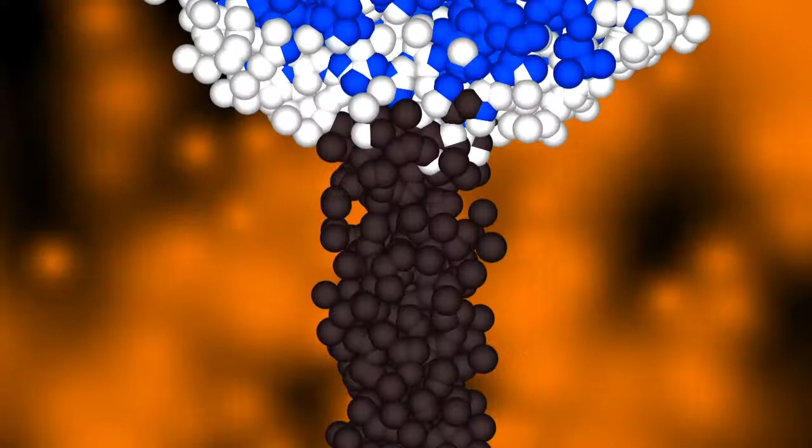As the global economy develops, there is a growing demand on energy, particularly oil. However, oil, a strategic resource of our economy, is gradually in depletion. This is a challenging issue for every country to face and cope with.

The future of petroleum: EOR technology and equipment.

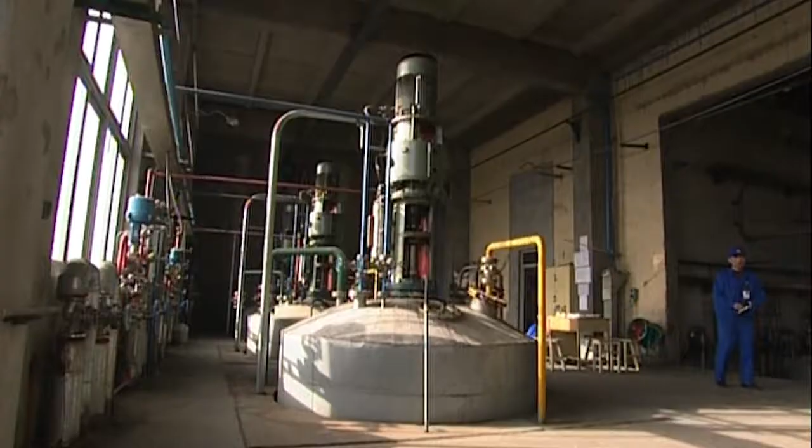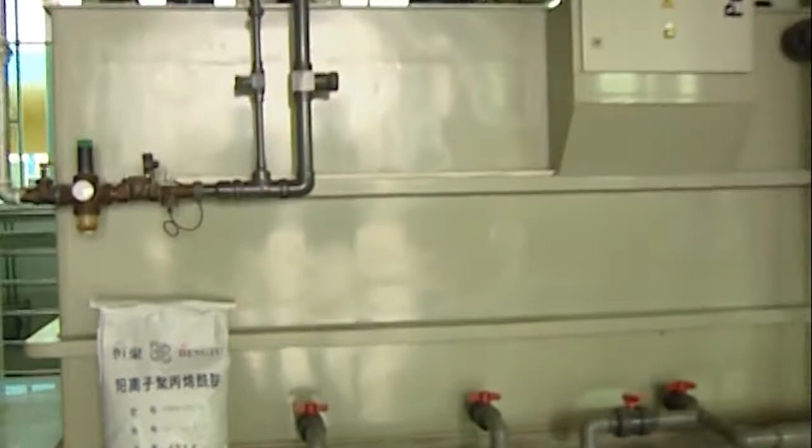Beijing Hengju Chemical Group Corporation is looking to the future to address this issue, and after many years' research and development, we provide a wide range of products and services to the petroleum and chemical industry. Our products and services include oil-field chemicals, water treatment chemicals, and associated engineering equipment.

After 20 years' growth, we have developed into a leading polymer manufacturer in China, and moreover, a renowned and experienced international organization, supplying product and associated engineering services for oil field production and drilling, enhanced oil recovery, and water treatment.

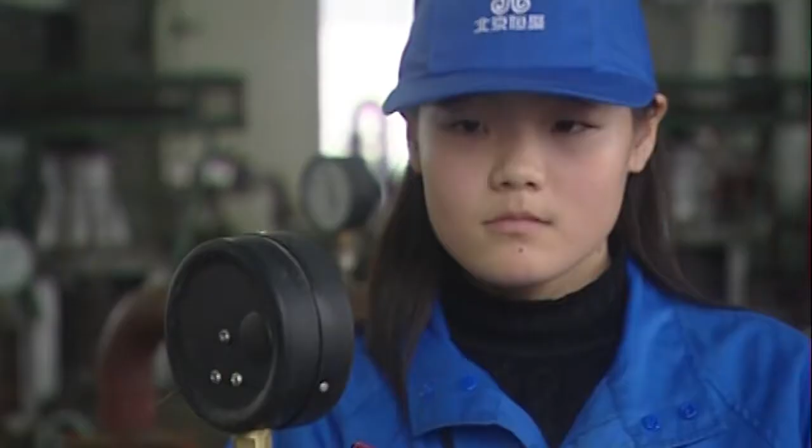Beijing Hengju is fully committed to the development and servicing of the international market, and now has fully owned overseas subsidiary companies in Canada, the United Kingdom, the United States, and Oman, and offices in South Africa. We have 3 production sites in Beijing, Shanghai, and Henan, along with a Research and Development Center.

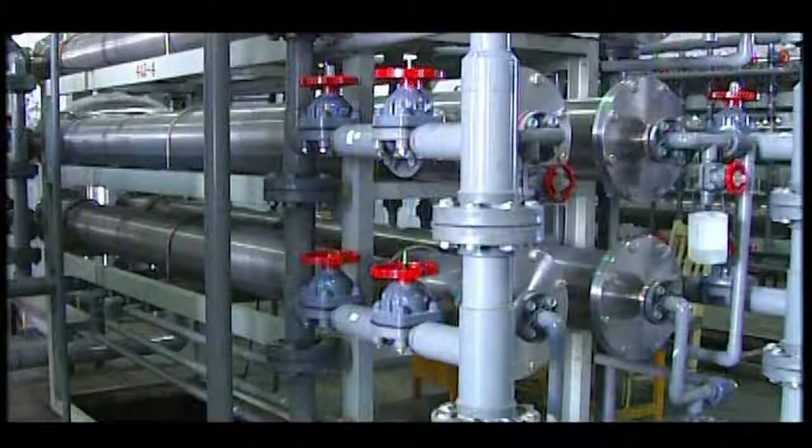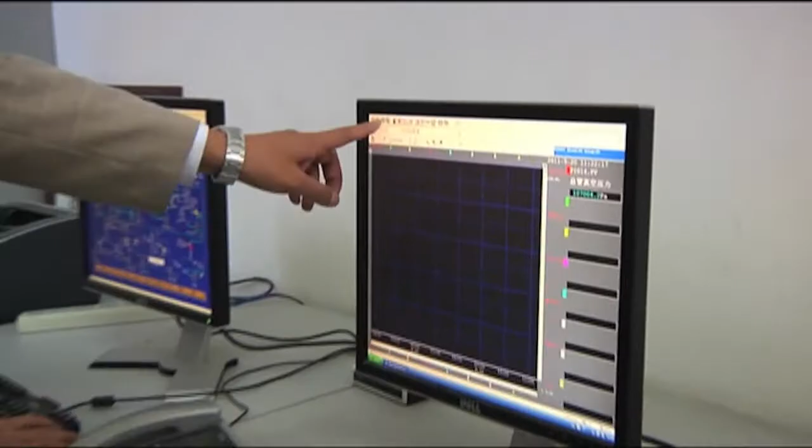The current total polymer capacity is 100,000 tons per year, acrylamide 100,000 tons per year, and others 20,000 tons per year. To meet the growing market demand on ASP flooding, we can supply EOR surfactant with a capacity of 70,000 tons per year.

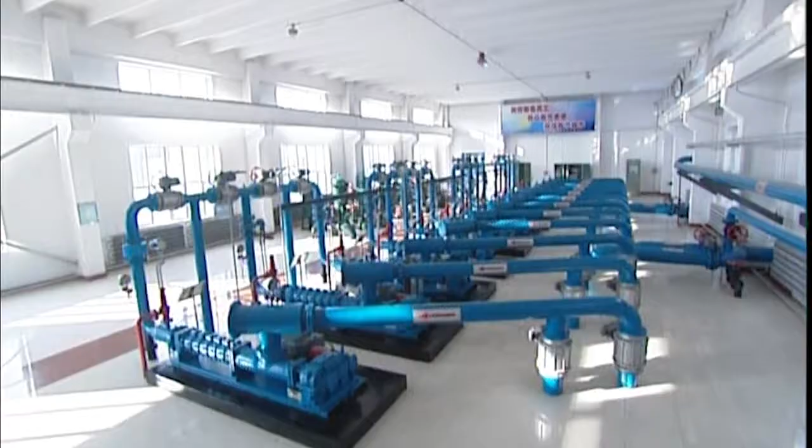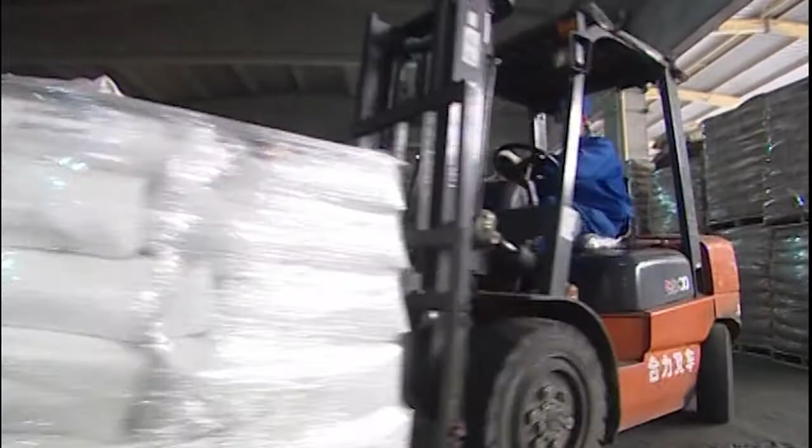Beijing Hengju has grown rapidly as a result of its involvement in the Chinese oil field industry from 1993, where a variety of our products were used to improve the efficiency of oil production, including EOR research and development. So far, over 500,000 metric tons of EOR polymers have been supplied to Chinese oil fields. More recently, associated engineering equipment have been developed and supplied too.

Today, Beijing Hengju's footprint on EOR projects is both home and abroad, such as Daqing Oil Field, Shengli Oil Field, Huabei Oil Field, Dagang Oil Field, Xinjiang Oil Field in China, as well as oil fields in Canada, the United States, South America, Russia, the Middle East, and Asia Pacific.

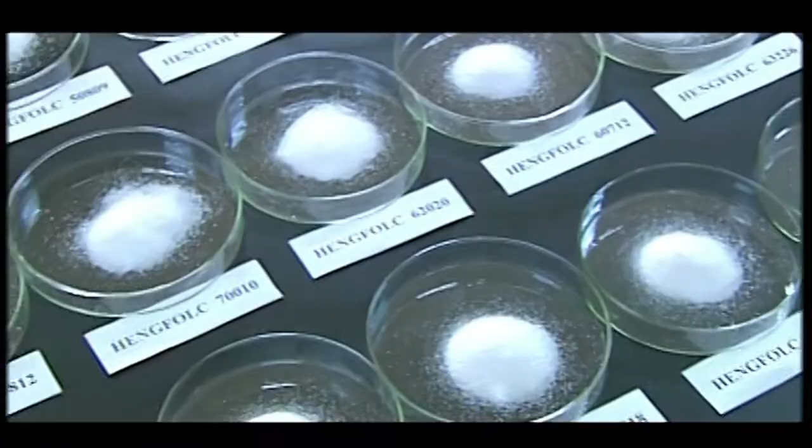Our EOR chemicals consist of 3 series: Kaipam, Hengfolc, and Hengpan. They are used to improve oil recovery rate, profile modification, as drilling fluid additive, and fracturing and acidizing treatment.

To meet the requirement of high temperature and high salinity level, we developed the Kaipam series, which have a comb branch polymer structure.

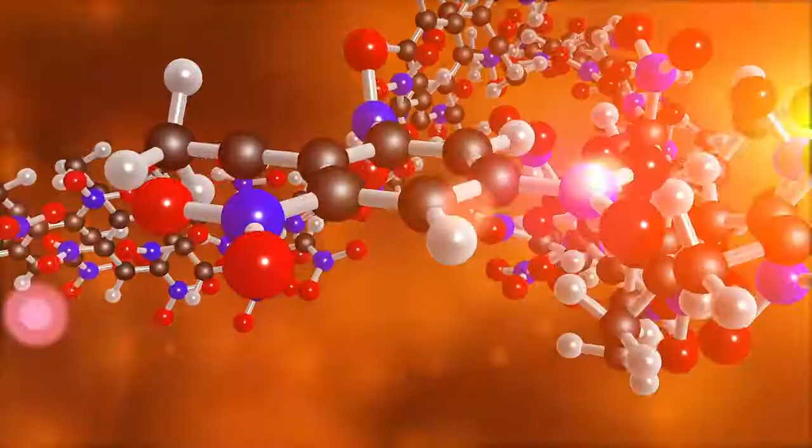Kaipam is applied in a variety of reservoir conditions, particularly in high temperature and high salinity condition, where Kaipam products still maintain a high viscosity, so the usage is reduced by 20 to 25%. In this case, Kaipam is extensively used in most Chinese oil fields as a more economic solution.

Kaipam has been through 2 generations. Kaipam X series is used in reservoirs where temperature is below 80 Celsius and salinity is equal to or lower than 30,000 mg per liter.

Kaipam XSH, the second-generation series, has a viscosity retention ratio that reaches industry standards at 90 Celsius under non-oxidant conditions, with salinity up to 60,000 milligrams per liter. It's a high temperature and high salinity resistant polymer.

For example, Kaipam 7S is used in the high permeability condition of Shengli oil field. Kaipam 1S and Kaipam 2S are used in low permeability of Jiangsu oil field. Kaipam 3, 4, 5, 6S, H are used in the oil fields of the Middle East, Africa, America, and Asia Pacific.

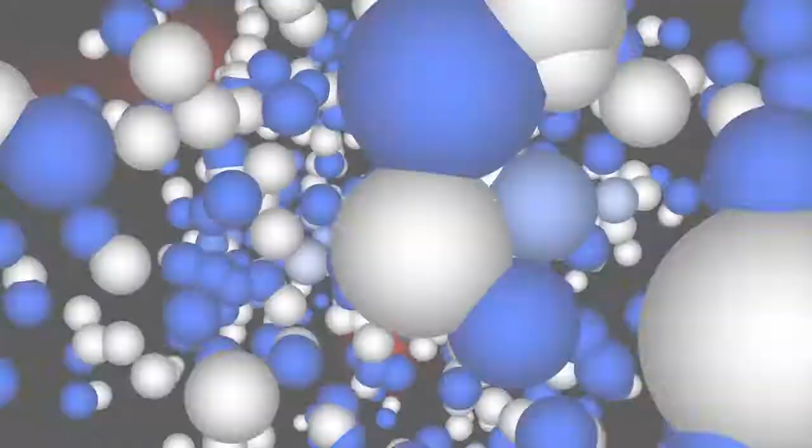To meet the growing market demand on ASP flooding, the EOR surfactant BHS series is developed. BHS surfactant has strong anti-adsorbent properties and is compatible with other chemicals, achieving high activities within a low concentration range and can be adapted to different conditions.

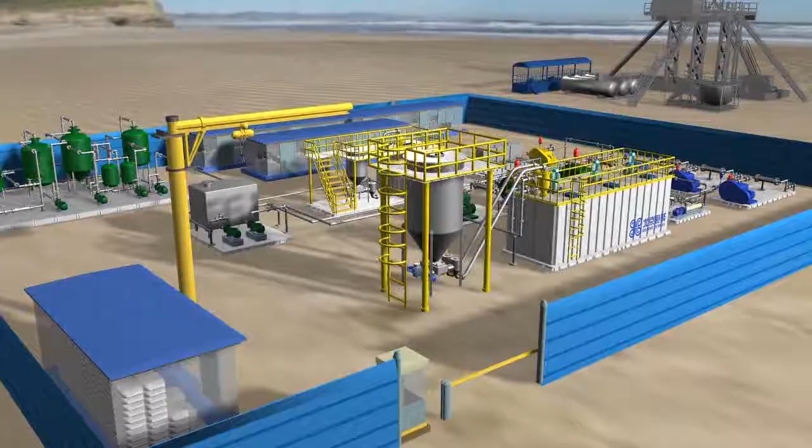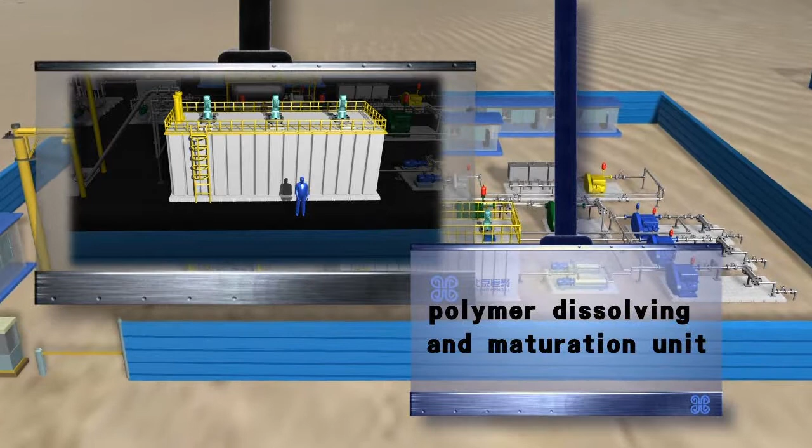EOR engineering equipment comprises a fully automatic control system, water supply unit, powder polymer storage and dosing unit, polymer dissolving and maturation unit, polymer mother solution dosing unit, water injection unit, and polymer mother solution and water mixing injection unit.

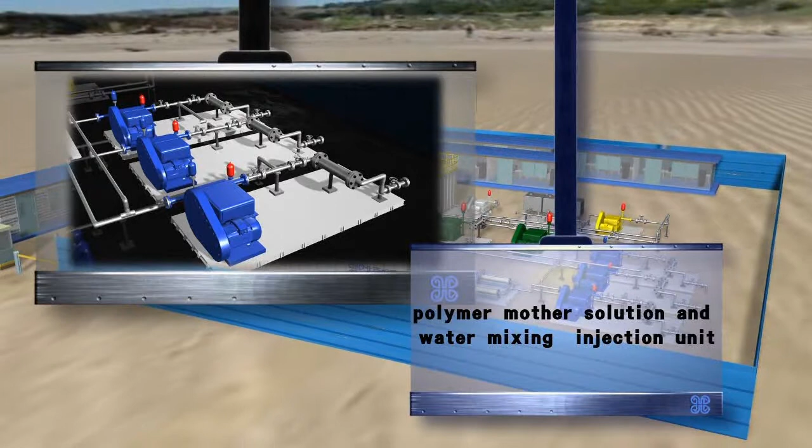For EOR applications, Beijing Hengju has developed systems for polymer flooding equipment, SP flooding equipment, and ASP flooding equipment.

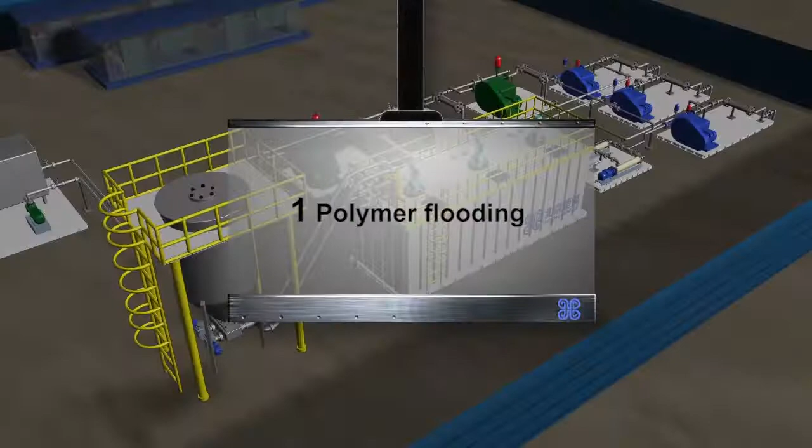1. Polymer flooding. Polymer flooding system includes powder polymer storage and feeding, polymer mother solution dissolving and maturation, and polymer mother solution and water mixing and injection. A. Powder polymer storage and dosing unit: a screw feeder controlled by a variable speed motor for adjusting polymer solution concentration.

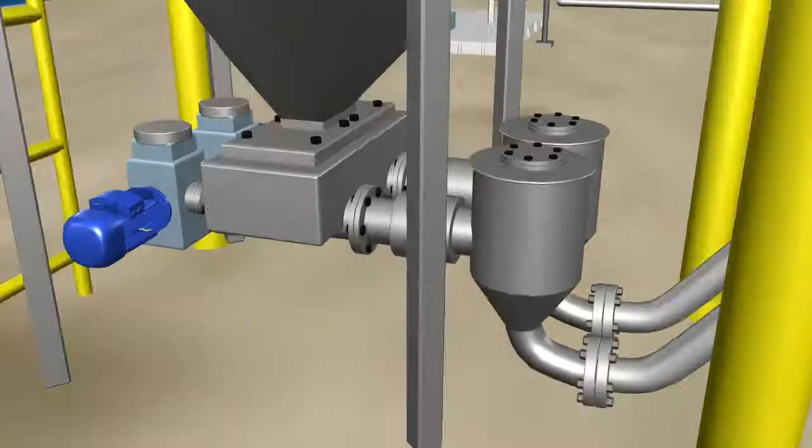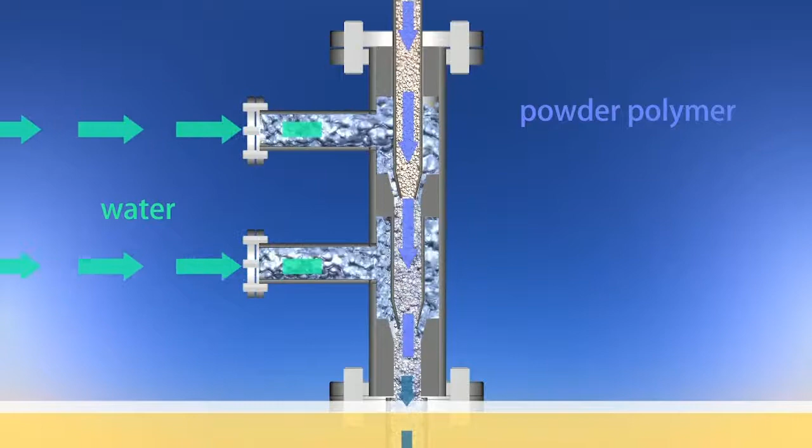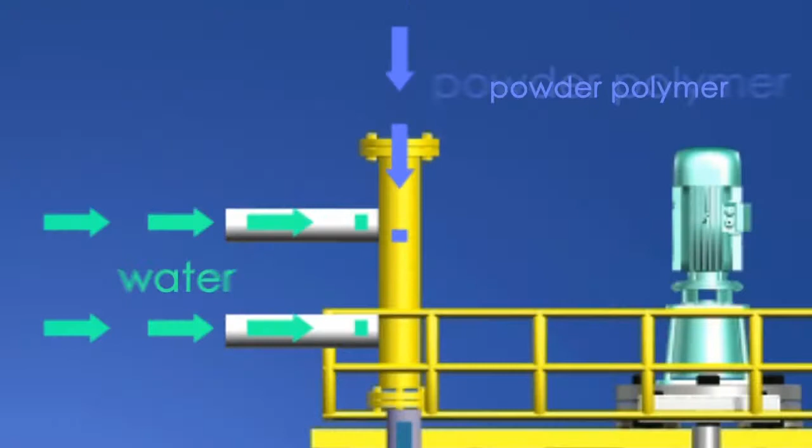B. Polymer mother solution dissolving and maturation: use of a Venturi ejector in the maturation tank inlet. Powder polymer transported by the screw feeder is blown into the Venturi, where it is dispersed by a high-pressure water supply and then flows into the agitated maturation tank. Within an appropriate time scale, depending on mother solution concentration, the polymer solution is fully matured and ready for use.

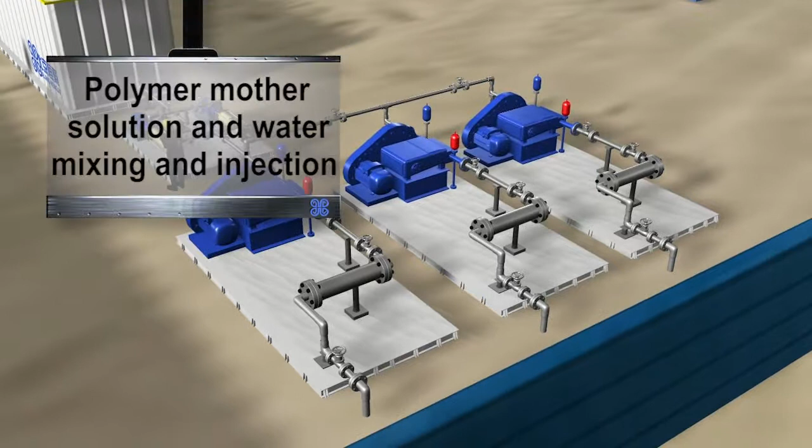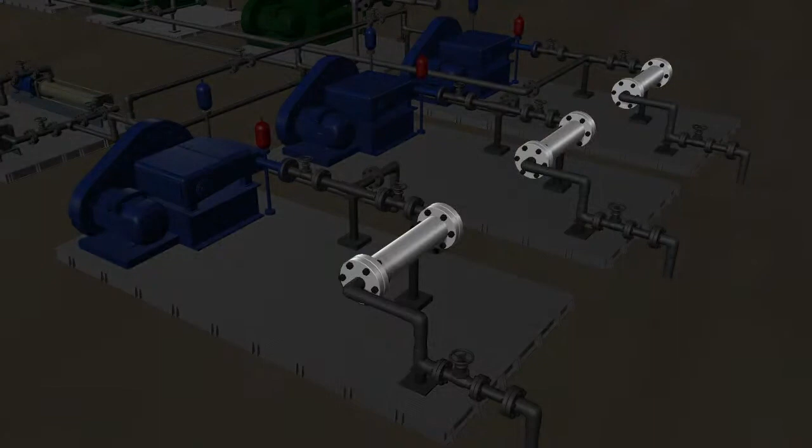C. Polymer mother solution and water mixing and injection: after maturation, the mother solution is injected into the polymer injection pump, and together with high-pressure water, goes into the static mixer and then is injected into the reservoir. The whole system comprises powder polymer dosing, dissolving, maturation, feeding, and injection. It has the below characteristics.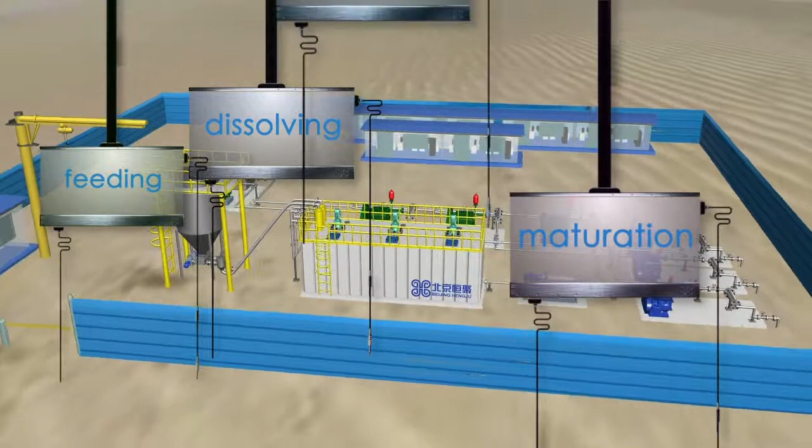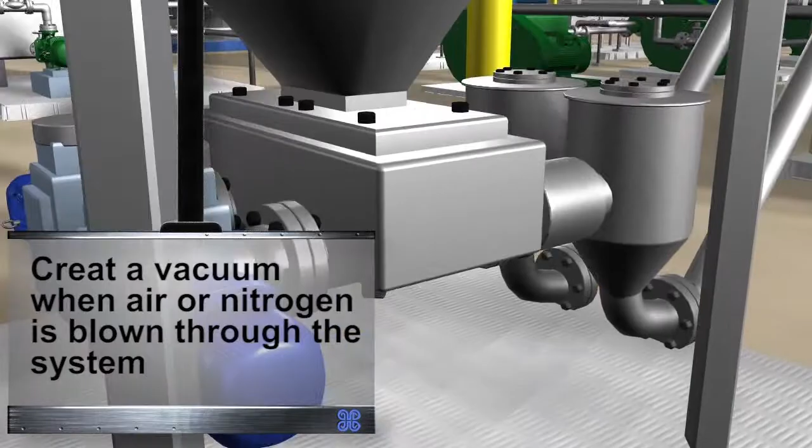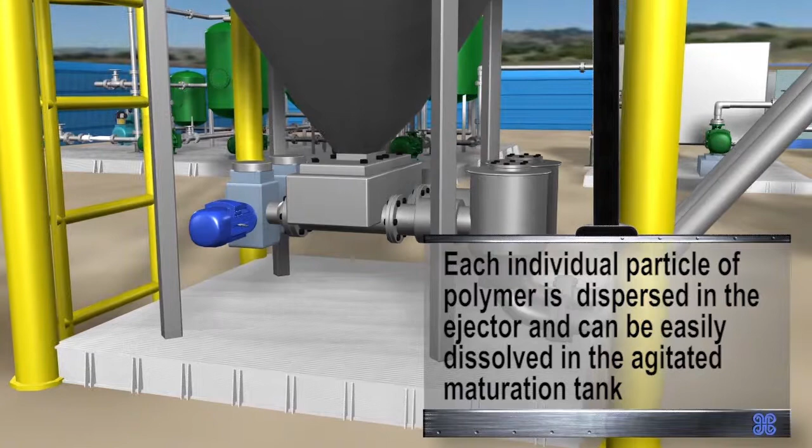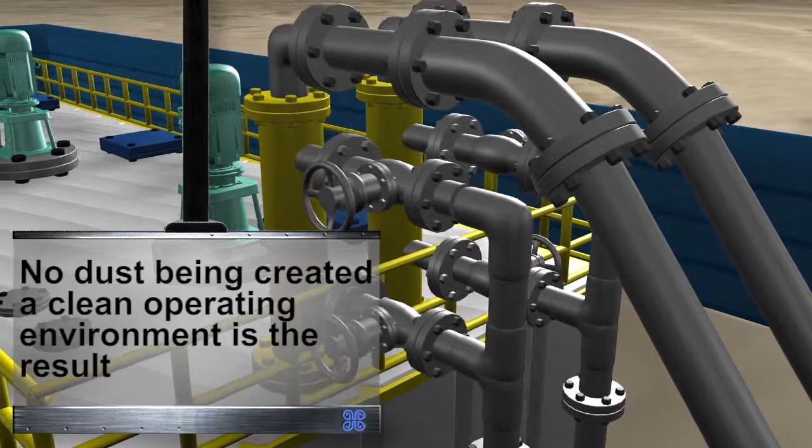The process makes use of a Venturi ejector, which creates a vacuum when air or nitrogen is blown through the system, therefore transporting the powder polymer so that it can be wetted out by a high-pressure water supply. Each individual particle of polymer is therefore dispersed in the ejector and can be easily dissolved in the agitated maturation tank. With no dust being created, a clean operating environment is the result.

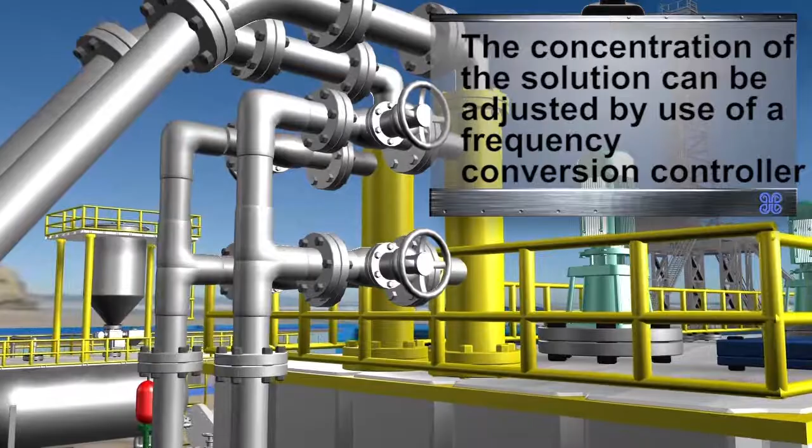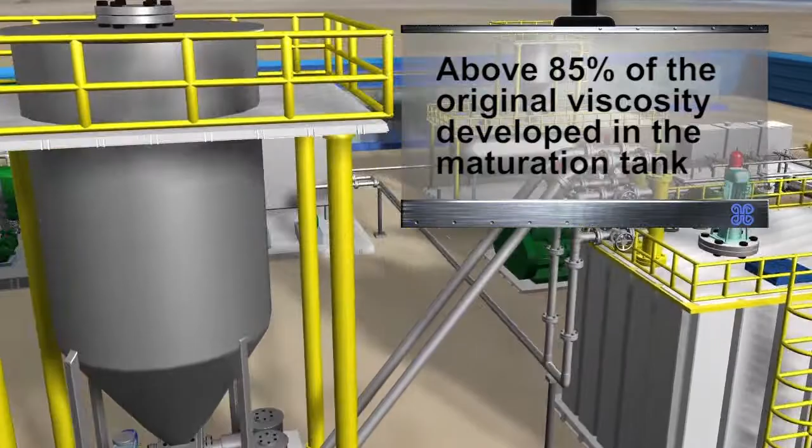The viscosity retention rate of the output solution at the point of injection is above 85% of the original viscosity developed in the maturation tank.

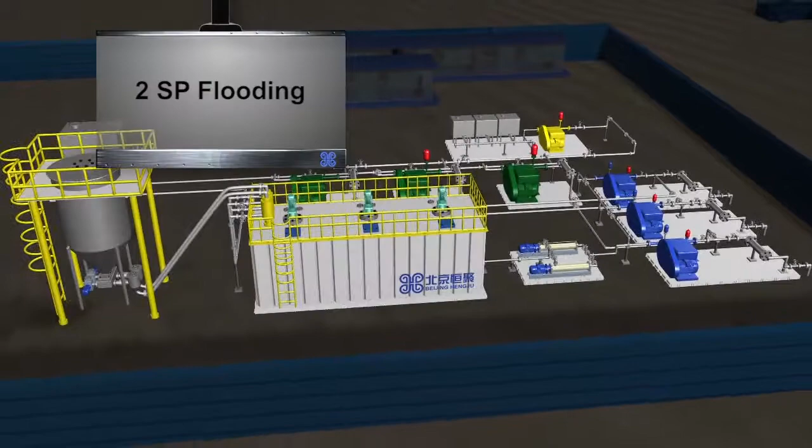SP flooding: compared with polymer flooding, the SP flooding system has a surfactant component. Included in this design is a surfactant storage tank, water pump, and surfactant dosing pump. The surfactant and water are pumped into the first static mixer and then pumped into the second static mixer.

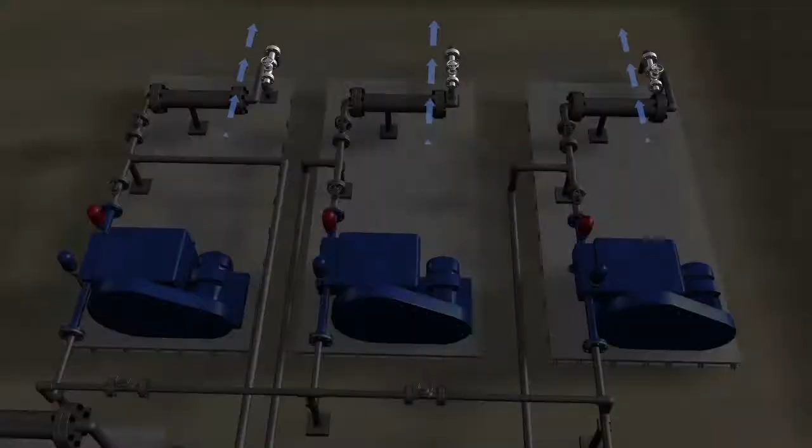In the second mixer, the solution is fully mixed with polymer mother solution after maturation and then injected into the well. The surfactant reduces the interfacial tension between oil and water. The oil recovery rate is improved when the interfacial tension is lower than 0.001 millinewton per meter.

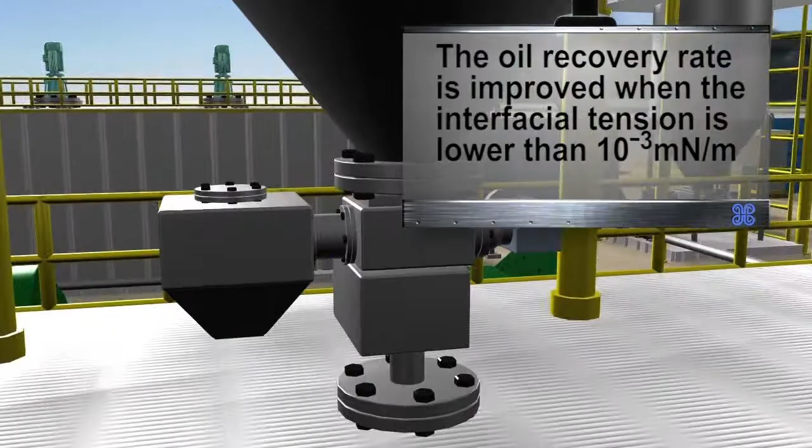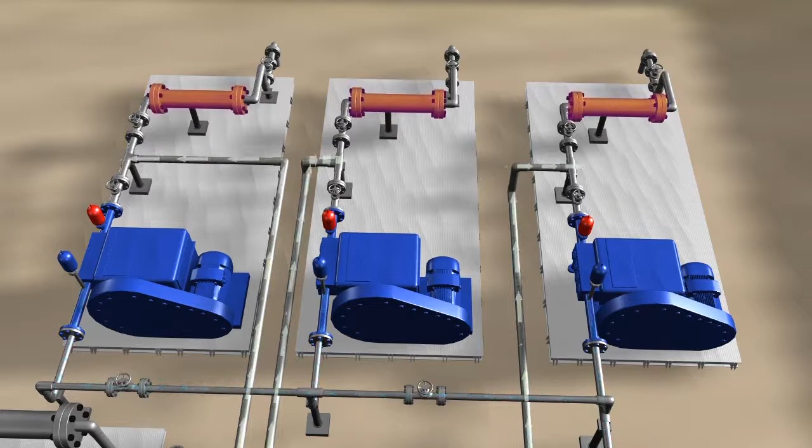ASP flooding: compared with polymer flooding, the ASP system has an alkali and surfactant mixing unit. After being dissolved in water, the alkali solution is pumped into the first static mixer through a dosing pump to mix with surfactant solution. Then the mixed solution is pumped into the second static mixer, where it is fully mixed with polymer mother solution and then injected into the well.

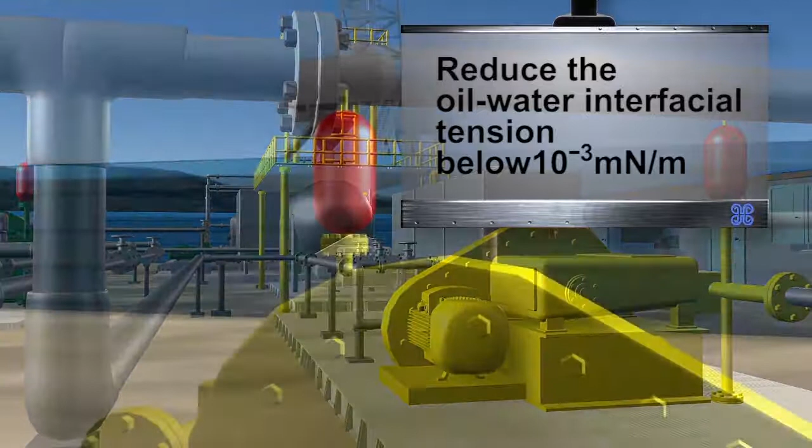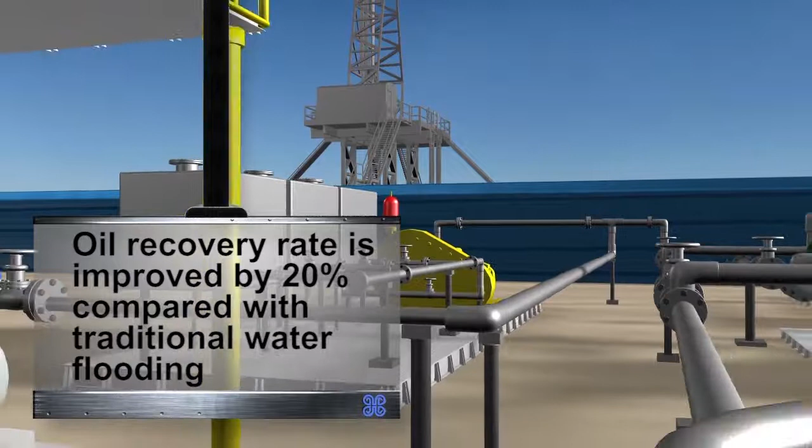By the use of polymer, the area of swept volume within the reservoir is increased, and the surfactant and alkali solution reduces the oil-water interfacial tension below 0.001 millinewton per meter. In this case, the oil recovery rate is improved by 20% compared with traditional water flooding.

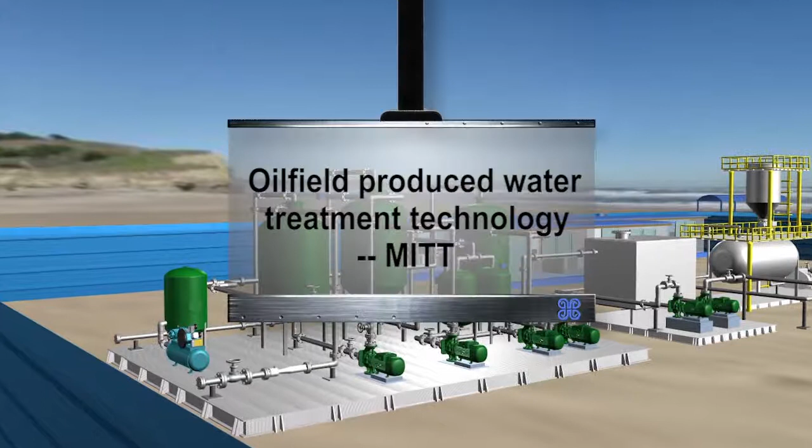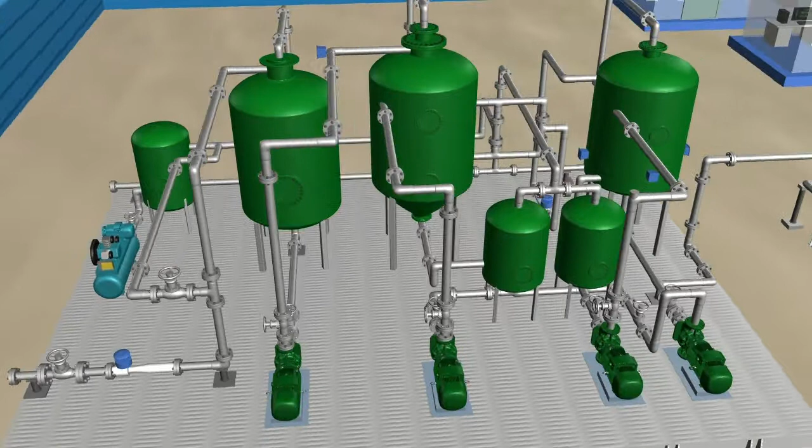Oil field produced water treatment technology (MITT). To meet market demand, Beijing Hengju developed some unique water treatment technology for oil field produced water treatment.

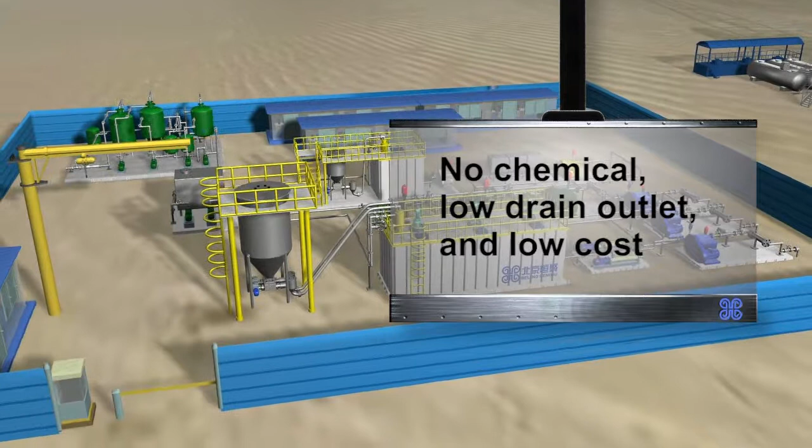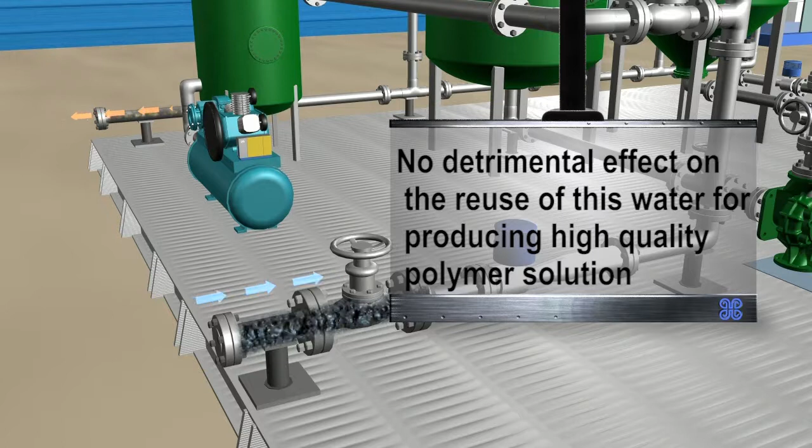It is a simple physical method, and compared to the usual chemical method, the advantages are obvious. Without chemical addition, it is more environmentally friendly, minimizes sludge discharge, and reduces operational costs. Meanwhile, due to the high quality of the treated produced water, there will be no detrimental effect on the reuse of this water for producing high-quality polymer solution.

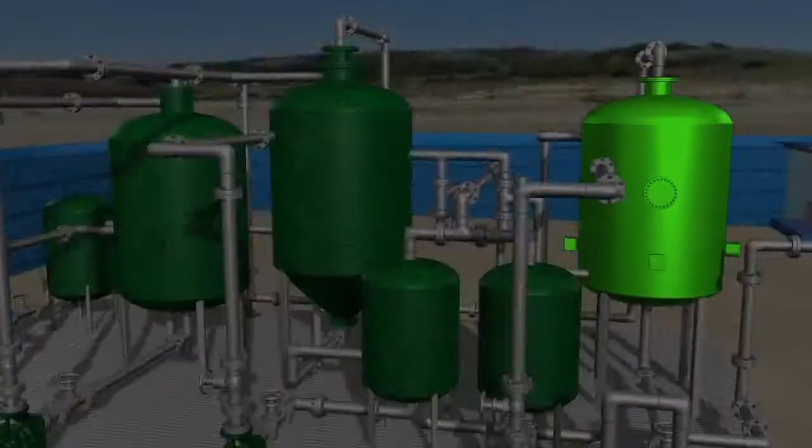The aeration and electric polarization process results in improved demulsification, desulfurization, and sterilization, in addition to anti-scaling and descaling properties. The MITT system contains a cyclone separator unit, continuous oil discharger unit, multifunctional continuous water treatment unit, and recyclable filter media unit.

Through the ejector, produced water containing entrapped air enters the high-speed cyclone separator. Oil and air are then pulled into the center due to high centrifugal force. Oil is floated up and collected by the topside oil collector.

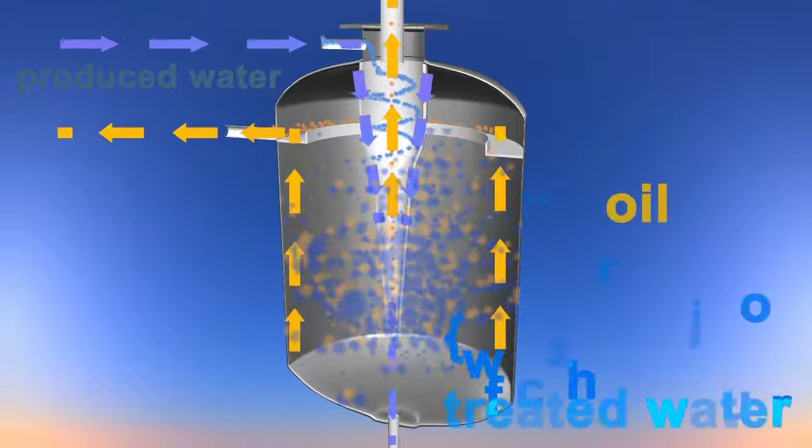After the cyclone separator, treated produced water is electrically polarized and then goes into the continuous oil discharger, where emulsified oil and suspended small particles are removed.

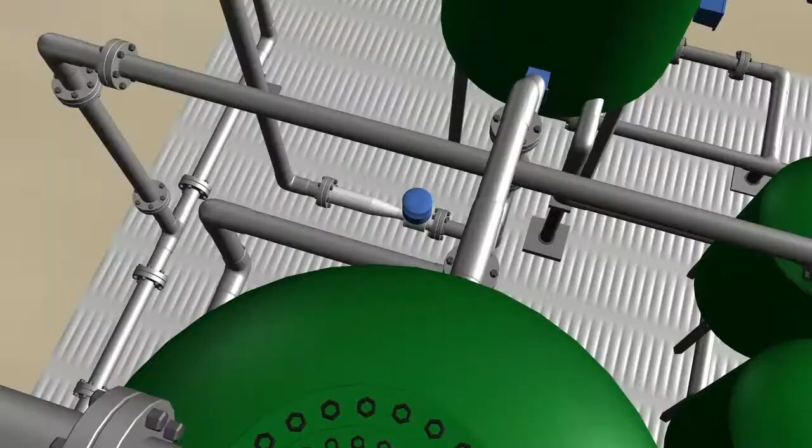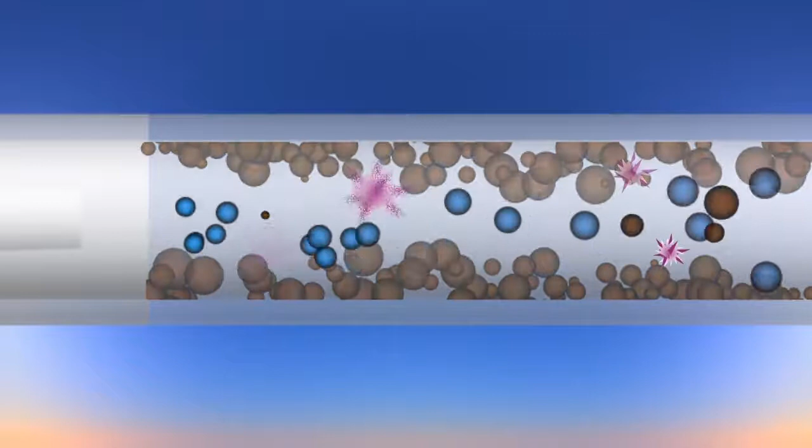The produced water then enters the ejector, where microbubbles are formed, and flows into the multifunctional continuous water treatment unit for desulfurization and removal of oil residue. At the bottom of the tank, electrode equipment is used for descaling and sterilization.

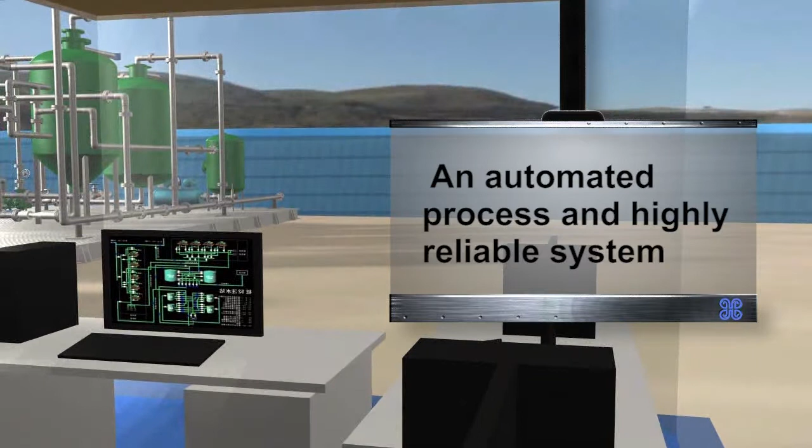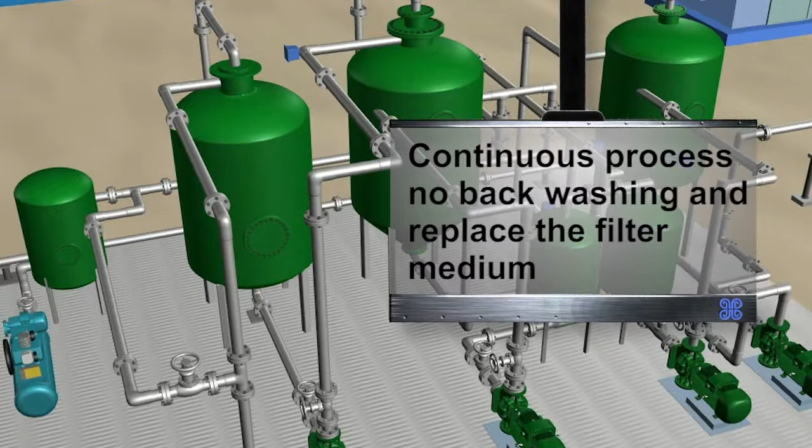MITT has a DCS control and a safety alarm system. It is an automated process and a highly reliable system, operating continuously with no backwashing requirements or need to replace the filter medium.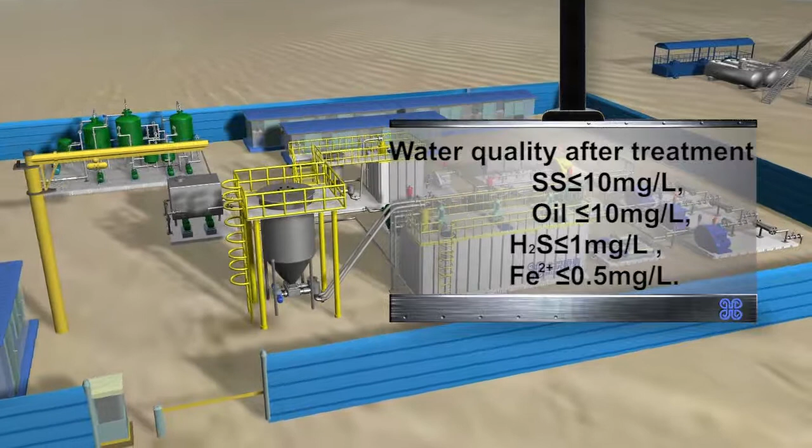After treatment, the oil content is less than 10 ppm, suspended solids less than 10 ppm, H2S less than 1 ppm, and ferrous content less than 0.5 ppm.

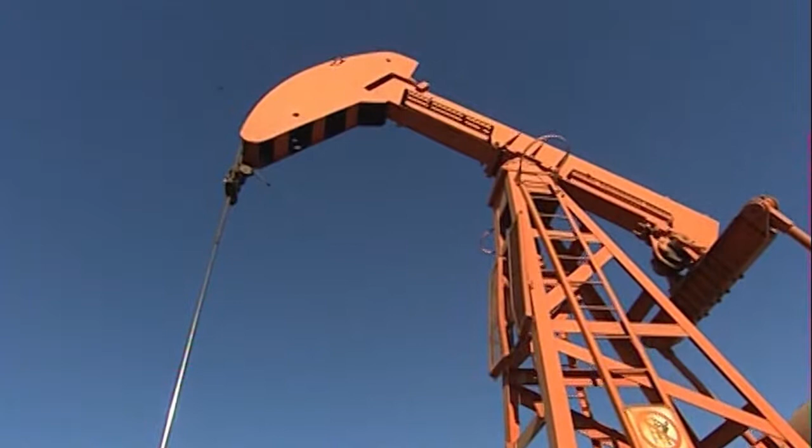In 2008, Beijing Hengju conducted feasibility studies on chemical flooding, laboratory research, numerical simulation, FEED, detailed design, and supply of polymer preparation and injection facilities for company Dove in Yemen.

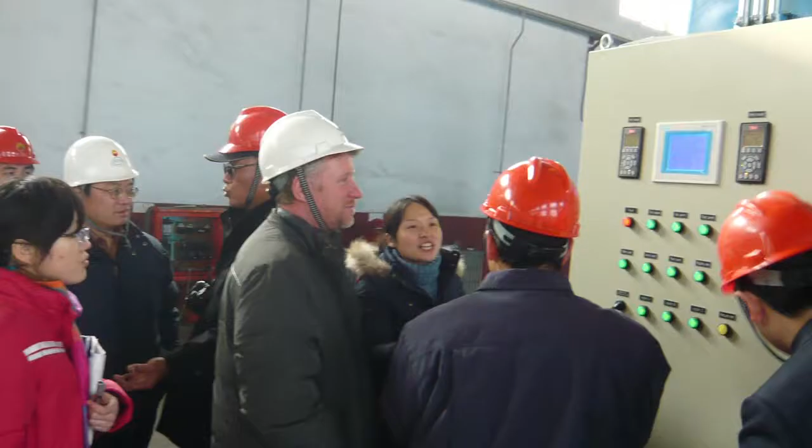In 2010, Beijing Hengju won the EOR project SP flooding of Kaji oil field, Rimau, South Sumatra, PT Medco E&P of Indonesia. We were the EPC contractor of chemical mixing and injection facilities. It has 6 injection wells in 2 injection layers.

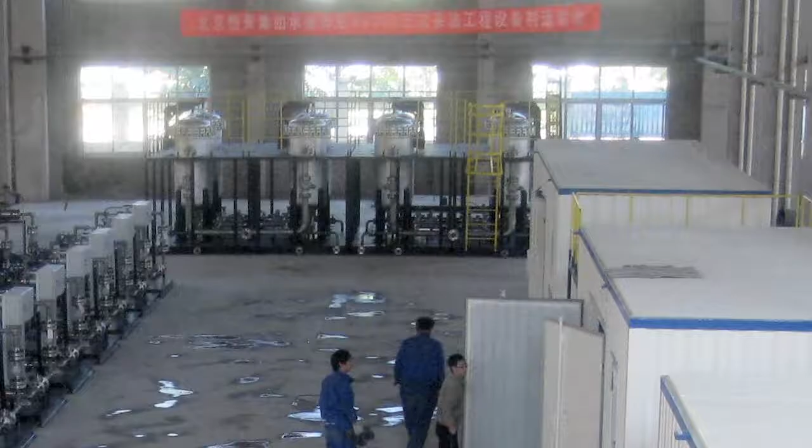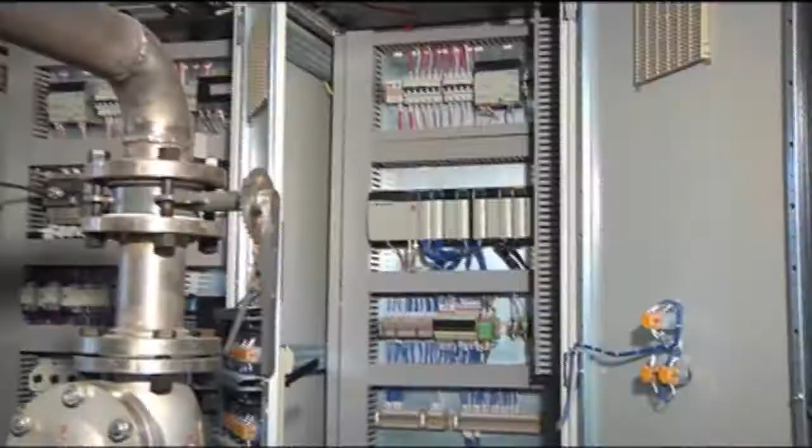Its injection capacity is 7,200 barrels and daily polymer handling capacity is 1.5 tons, and polymer mother solution concentration is 5,000 ppm.

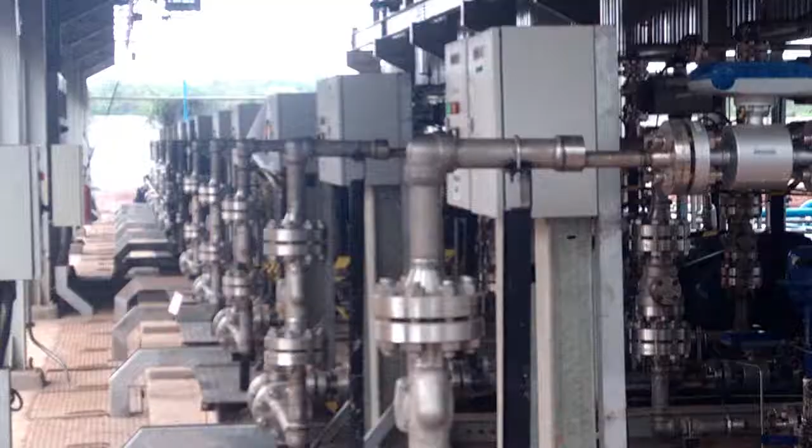We conducted FEED, detailed design, procurement, construction, commissioning, initial operation and maintenance, and chemical supply. It was operated according to API, ANSI, and ASME standards, and was inspected by a third-party inspection company, Bureau Veritas. The polymer preparation and injection system was supplied within 3 months after finishing final design.

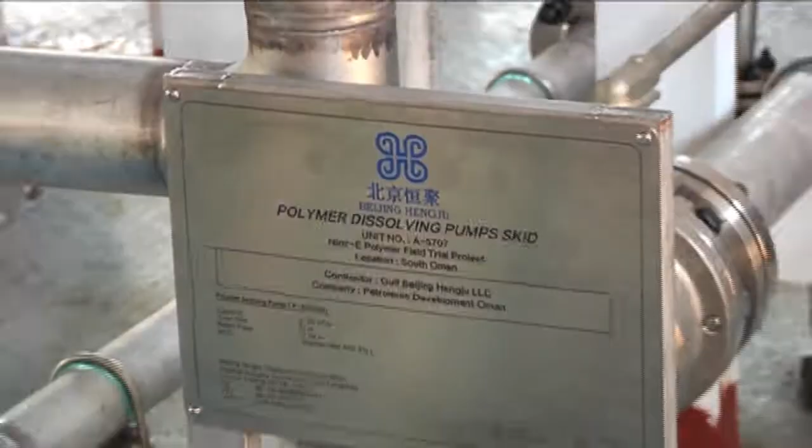In 2011, Beijing Hengju won the EOR project, Polymer Flooding, of Nimr-E, Oman. We were the EPC contractor. It had 3 injection wells.

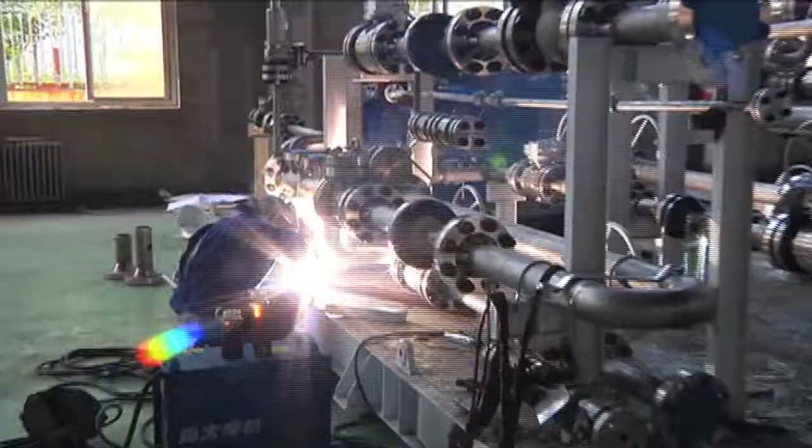Its injection capacity is 3,000 cubic meters per day, and daily polymer handling capacity is 7.5 tons, and polymer mother solution concentration is 5,000 to 10,000 ppm.

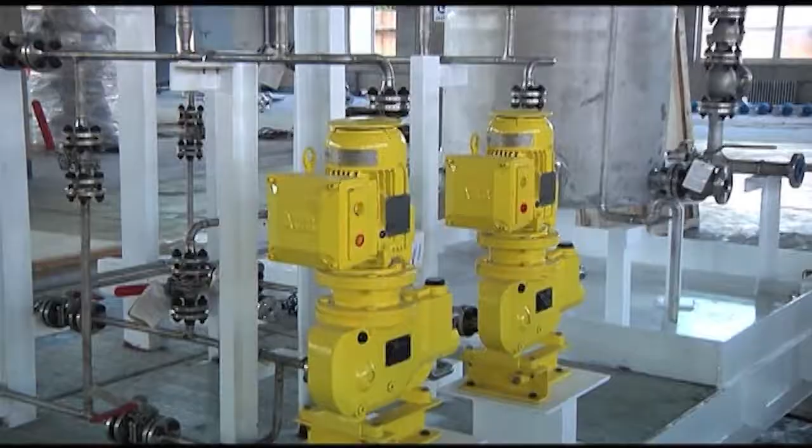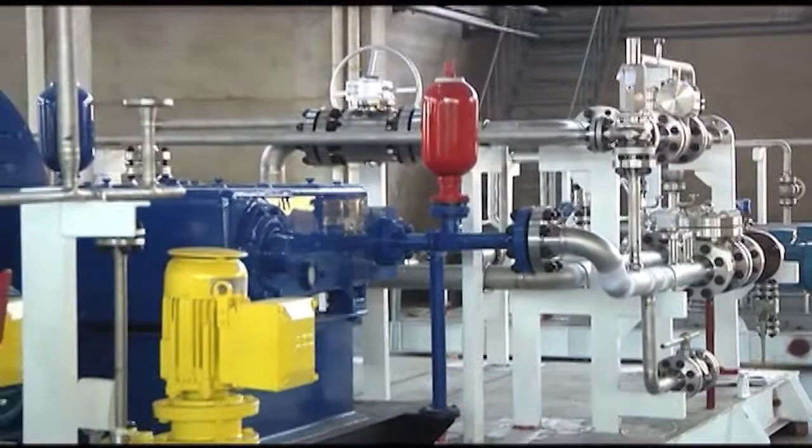We conducted FEED, detailed design, procurement from PDO-approved suppliers, construction, commissioning, 1-year operation and maintenance, and 3-year chemical supply. It was operated according to Shell and PDO standards, and was inspected by a third-party inspection company, Velosi. The polymer preparation and injection facilities were supplied within 4 months after finishing final design.

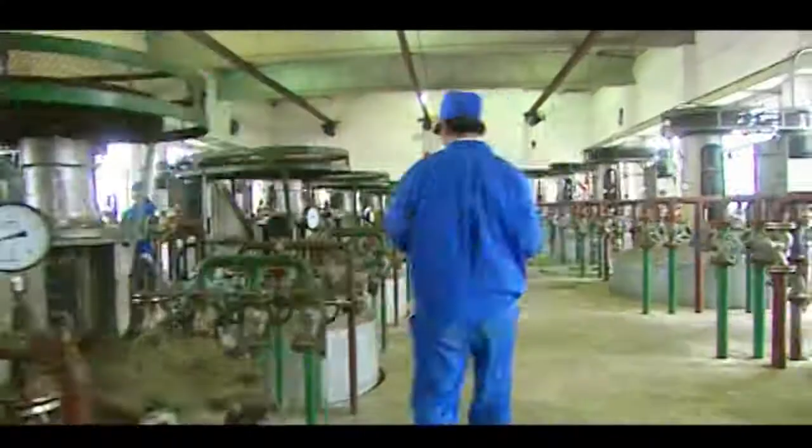High quality derives from innovation. Impeccable services result in good reputation, and great enterprise is built on team spirit. Thanks to our staff's endless effort, intelligence, and creativeness, and to our corporate culture of professional R&D and superb quality, Hengju has gradually developed into one of the most renowned and internationalized chemical groups in China.

Blessed with China's abundant resources and equipped with state-of-the-art technologies, we are now the most trusted and recognized partner in the global market. Hengju believes Chinese wisdom will make the world more beautiful. We are determined to join hands with clients from around the world to head into a future of win-win harvesting.